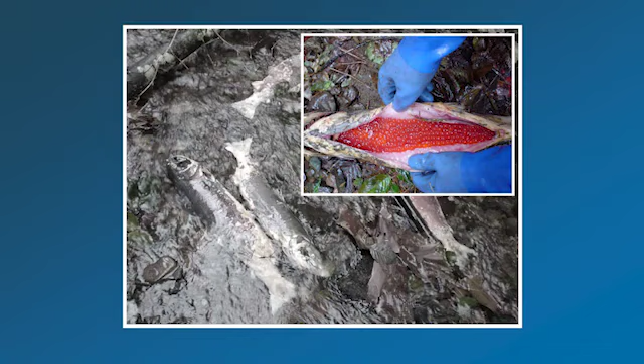And then in kind of the 80s, 90s, we started adding stormwater code to add treatment and storage so we don't affect our neighbors. That was great. My career began when everybody was realizing we're still really affecting the hydrology of our systems. We need to do low impact development, treat water at the source, do things that mimic natural hydrology. And that's evolved over the last 20 or so years to increase more and more nature-based systems.

And now I believe we're in this new paradigm that I call green infrastructure plus. Our local agencies are trying to use green infrastructure and stormwater management, and see the opportunity to not just manage stormwater, but to improve communities, to improve equity and resilience, to address disadvantaged communities that are most impacted by water and drainage issues, because that's historically where people have done that.

And that's really, I think, where stormwater parks come in. We have the ability to do more with stormwater management when we work with partners and create these spaces that manage stormwater, but also improve our communities.

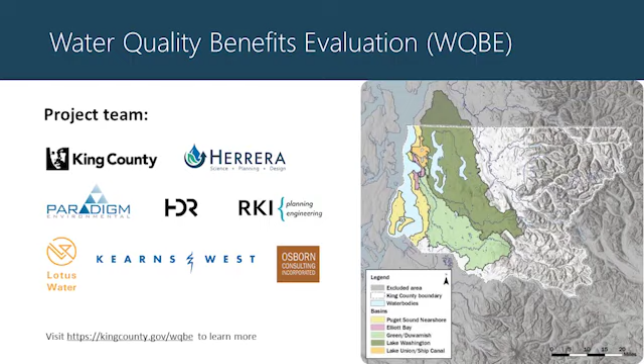So maybe we can have some discussion around this. One of the things as we were planning for this was, what is the definition of a stormwater park? And there's a couple that are out there, right? Erica Harris is here. She'll be presenting a little bit later on, but Puget Sound Regional Council has this definition in their literature. But really the key here is managing stormwater, benefiting communities, and creating recreational spaces. FEMA also uses the term stormwater parks, but they actually up the scale a little bit.

They talk about communities in this definition, and they talk about water quality, but also they talk about extreme events, because that is really where green infrastructure has come up short in historical ways. It's meant to manage the smaller storms and the hydrology. And it's a very key part of our toolbox.

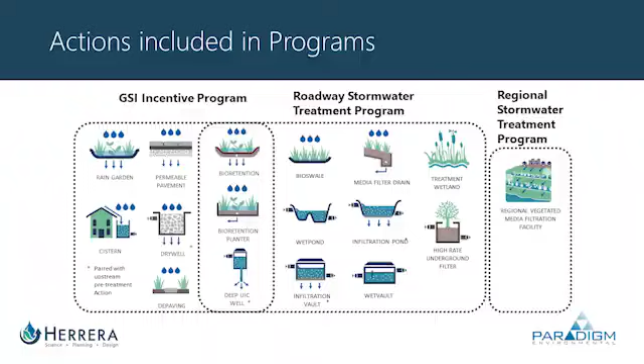But at times, we need extra storage. We need extra space to provide that water quality as well as having space. But we don't need that all of the time, right? So can we design stormwater facilities and parks that share the space, maybe temporarily or even physically? And I'm going to go into a couple of different examples as we go through there.

But if you have the need for storage during extreme events, those are often times when people aren't gathering in those spaces. So can you design it so that you're making it accessible and beneficial for all of those dry periods where it's not full of water?

So we went through an effort. We were also in King County and Seattle Public Utilities Green Infrastructure Program. And in, I forget what year it was, the mayor's office set a goal to manage 700 million gallons by the year 2025. So that's a core aspect of this program, meeting and achieving that goal.

SPU asked the question, well, how are our ponds doing? Can we count our ponds as green infrastructure? And so we went back over the definition of green infrastructure and said, well, what does that mean? And so the first thing we said was, well, the original definition that's currently in their plan was distributed stormwater management practices that mimic natural systems and provide multiple benefits.

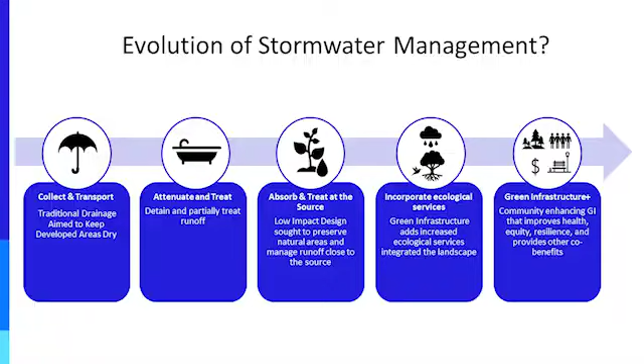We found that all we needed to do to be able to take credit for stormwater ponds is remove that word distributed. Because when we're talking about stormwater ponds, or stormwater parks, we're talking about more regional solutions. They're sometimes more concentrated, but that's not necessarily the only way to address the issues. And then what we found was really at the core of this definition is a two-part test.

Is there some function that we're providing for stormwater that's mimicking natural hydrology? And that could be through water quality, flow control, infiltration, reuse, or even mimicking floodplains. So we looked at all the ponds and said, okay, are they doing some function that's doing more than just a typical storage pond, but doing more of a mimicking of natural functions?

And the second part, which I think is really important, is it providing community benefit? And that benefit can range from public access for recreation, whether it's active or passive, to just being a visual amenity, or an amenity that the ecosystem can enjoy, and we're, again, supporting urban ecosystems through this.

And so we went through all of Seattle's ponds and basically categorized them and said some of these are actually green infrastructure because they are providing these additional benefits. And I think that kind of ties into these definitions of stormwater parks.

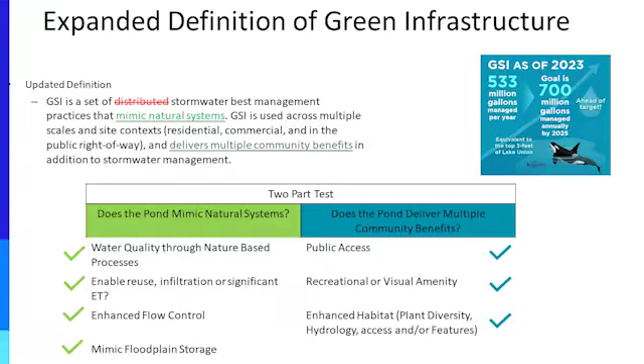I think another thing I want to get across is a big trend now for blue-green infrastructure. Who has heard of blue infrastructure? Yeah, it's about half of us or so, but I think that's also where stormwater parks fit in. It's a very specific type of green-blue infrastructure. Green infrastructure being that traditional definition of those small storm, distributed vegetative systems that mimic natural hydrology.

Blue infrastructure being those larger facilities that can handle larger or more extreme flood events and provide that active storage when it's needed. So blue-green infrastructure combines the best of both worlds. So green infrastructure practices like bioretention, permeable pavements, vegetated roofs, with more blue infrastructure that is larger ponds and surface areas where we can store water temporarily for extreme events.

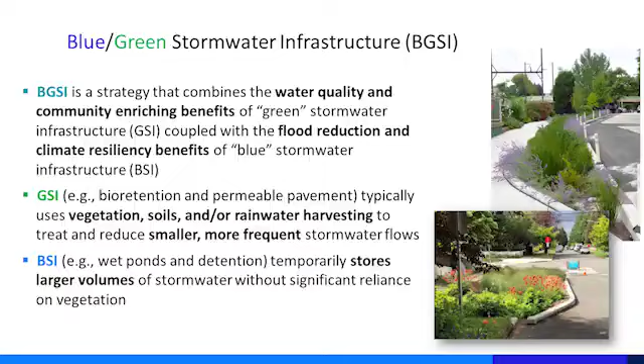And when we combine them together, we can get everything we want from stormwater to some extent, right? We can get water quality treatment, we can get resiliency, we can build systems that are adaptive, and we can enhance the community. And a term that's been used, where we're doing some work in New Orleans, is living with water. It's changing our paradigm from that drainage one that I talked about, where we're just moving the water away from us, to learning how water is a resource and it's something we live with, and extreme events do happen.

But we can build our infrastructure so we're sharing that space. When I started my career, we were building ponds that had fences around them, like stormwater prisons. I didn't want to build more stormwater prisons that keep people out. We want to invite people in a safe manner.

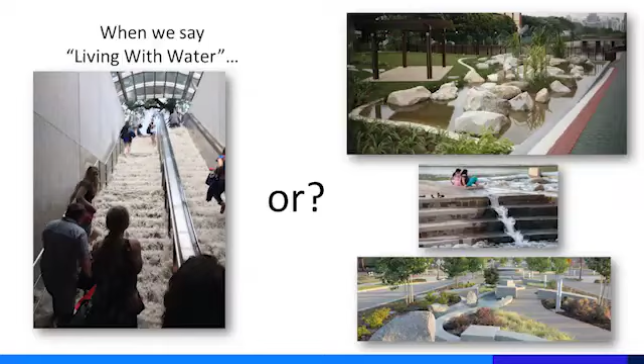So if we go for infiltration or reuse, we need a little more space. When we go for trying to address localized flooding, a little bit more space. When trying to address regional flooding, oftentimes that takes a lot of volume of water, so we need more space. But the community needs can be very variable. The community might be really in need of active space that they can use, and it's a little bit harder to share that area with stormwater. Or it could be more passive uses, more of a natural system where people just need access to green space.

So a really core aspect of that is exploring what are your true stormwater management objectives and what are your community objectives? And how can you find ways to overlap those either physically or in time, right? So it's whether you can use them as recreational space during dry periods and flooding during wet periods, or do you layer them? And that gets to this next point.

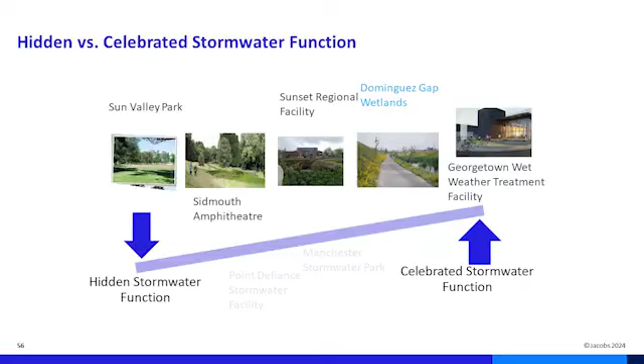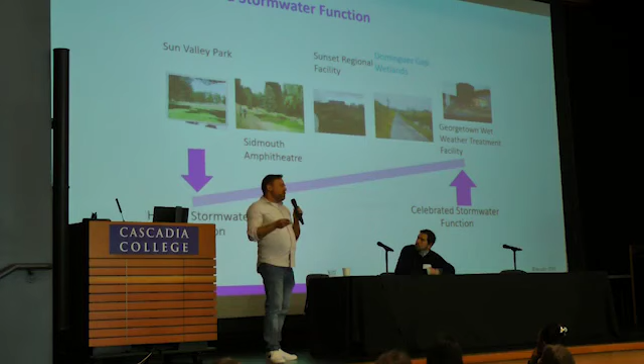Another way that I've looked at some of these stormwater parks is what are we doing with the stormwater? Are we hiding it in some way so that you can use more of that space for community uses? Are you celebrating the stormwater function? And I would argue that in the stormwater park, you could do either. It's really a matter of how it's sharing the space with the community needs. There's another scale that I haven't figured out how to put into this, maybe disguised stormwater function. When you initially look at it, it's just part of that community park space, but it's actually serving a stormwater function. And I'll show a couple of examples of how that's done.

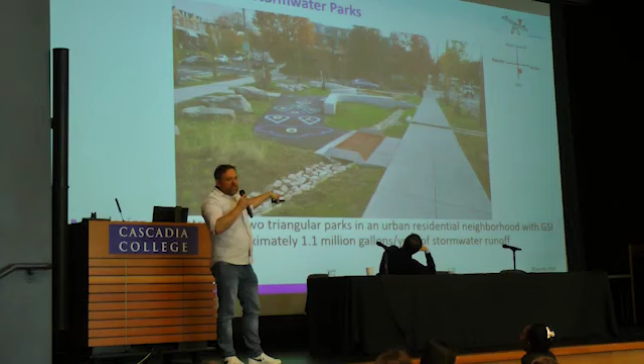It's another case where the stormwater is actually celebrated and we're inviting the community in, with play spaces to really playfully celebrate that function. You can see here we got a raindrops hopscotch little pathway there, and we've got benches around the water features so people can experience that space.

This is Rodney Cook Park. It's near the Mercedes-Benz, the new stadium there, but it's also a historically underserved community. In this area were residences that had been there for many, many years that frequently flooded because, lo and behold, this is where there used to be a creek.

And they piped it years ago to enable that development, and it floods. And this is unfortunately where more of the poorer communities would invest. And so they were very deliberate in Atlanta in engaging the community: what do we want to do here? You know, these are areas that are chronically flooding, and they ended up buying the property and building a park for the community and integrating stormwater into

that. So this is the footprint of it. As you can see, it's several blocks large. They worked with landscape architects in the community to kind of honor historic ideas for what this park could look like. And they basically built, in the center there, this permanent pool that is there as a community amenity for the park and providing water quality. But they intentionally designed this area to flood.

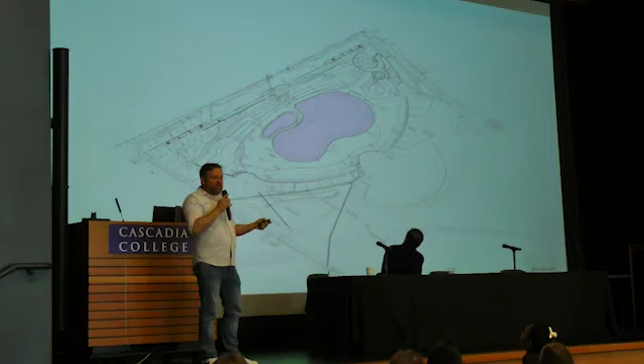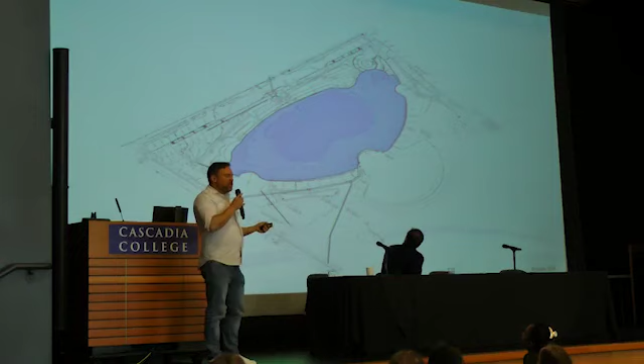So during normal periods, during the summer and all that time, it's this wet pool that's got pathways around it and some amphitheaters. But through the modeling, you can see during a 2-year storm, not much impact on park use. It's just filling up a little more of that surge area, filling the fringes. During a 25-year, it starts to flood a few of the pathways interior to the park, but still much of the park is accessible for the public to use. And then during the 100-year event, it's allowed to flood even further.

And this area that's an extra lobe there, as seen in plan view, is actually like a grass amphitheater, which, during a 25-year storm, people aren't using that space. But the rest of the time, it could be a really great community space. So this is, again, back in plan view. You can see that there's the permanent pool, but the dashed red line there is how much is flooded during a 100-year event. So again, an example of sharing that space temporarily so that you can create a community amenity while also managing stormwater.

And this is the built facility from perspective. There are really cool, thoughtful things they did in this project. They've got walkways and boardwalks that go out over the wetland area so people can really interact with it, look down upon it and see the wildlife that's thriving there now. Also for safety, but also as an amenity, that fringe area is a denser wetland to discourage people and children from going into the water, but you don't need to do that with a chain link fence. There are really cool features in your landscape architecture design to make sure that you're discouraging that space and educating people that this is a stormwater facility.

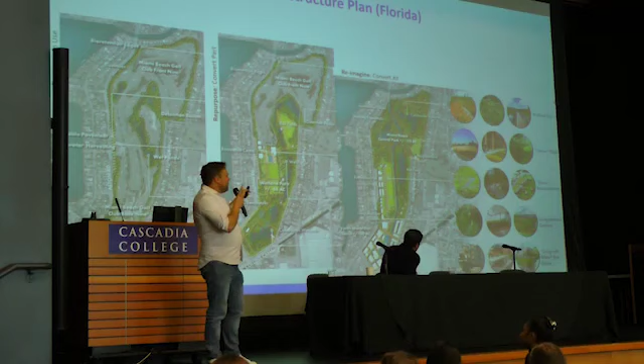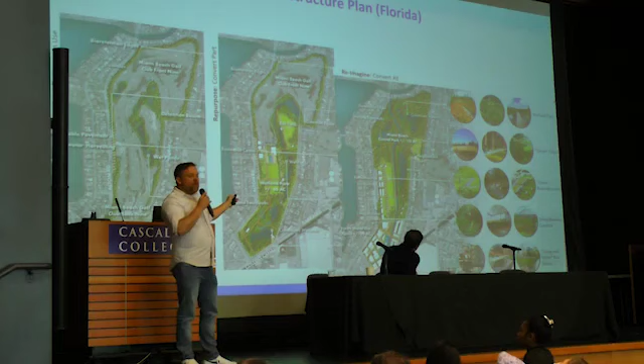One of my last national examples, this is a plan we did for Miami Beach, the blue-green infrastructure plan. Throughout that entire plan, we looked at the entire city and said, what are areas we can do blue-green infrastructure? And one of the ideas I want to highlight here is they have an old public golf course in the middle of the city that is no longer as economically viable as it used to be. People are going to other golf courses in Southern Florida. The idea here is we looked at different scales of stormwater interventions. The first one, the lowest level, is just keep the golf course there, but take all those water features and make them manage stormwater. So allow them to fill up more, allow them to have better function for stormwater quality.

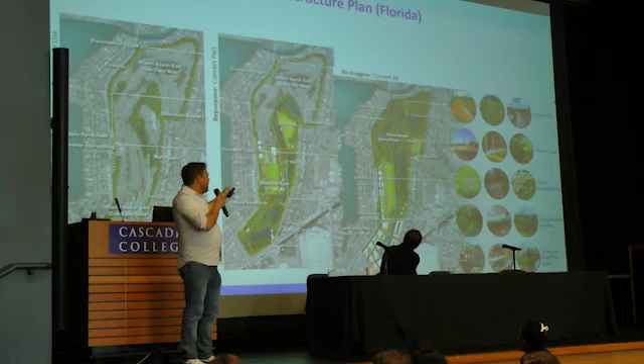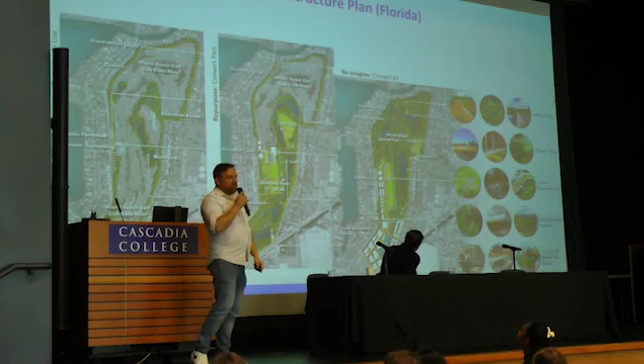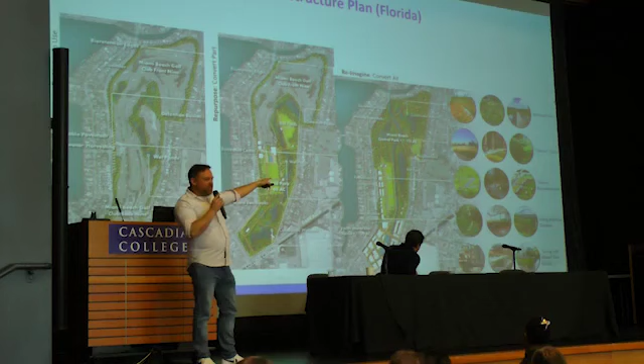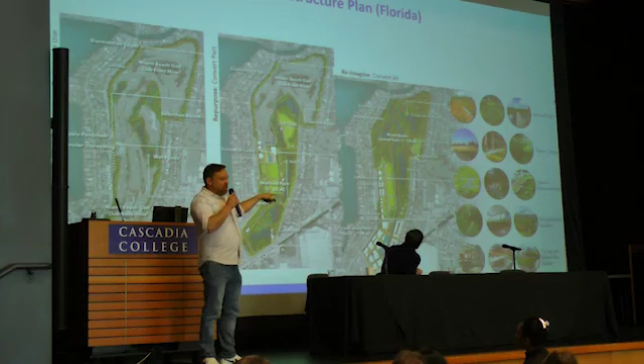The middle idea is let's keep a 9-hole golf course, but integrate the other half as natural systems, more passive recreation for the community, maybe put a few ball fields, but it allows us to do more stormwater management to address the large coastal storms that happen there. And the last idea is to really re-envision the space and think about the land use. So on the right-hand side, you probably can't see it because it's a big room, but there's a whole lot of green infrastructure and blue infrastructure practices we can integrate throughout this park space to meet the stormwater function and enhance the community.

So moving into some international examples, because we have some really great ones. Obviously, this is not a Jacobs project, but a lot of us get our inspiration from Copenhagen and the Netherlands and areas like that that have been managing and living with water for many years. This one's an interesting one. This is Benthem Square in Rotterdam.

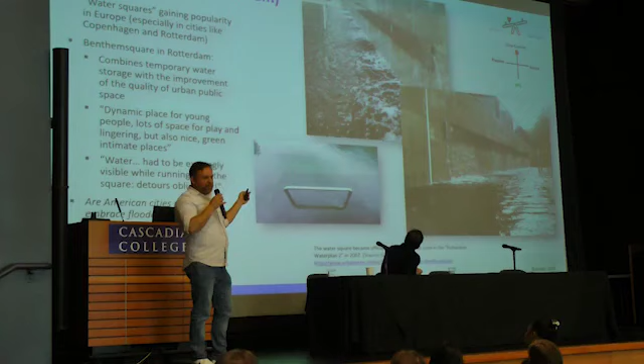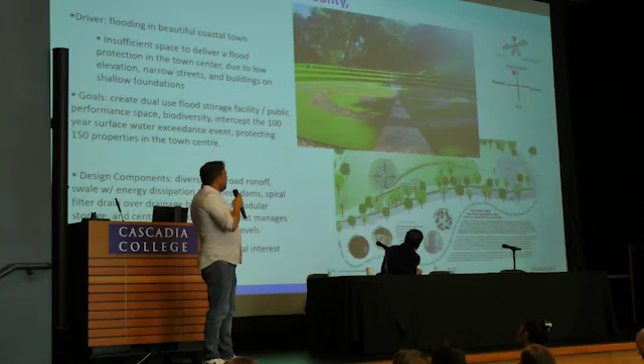What I think is interesting and worth highlighting here is this is like a public plaza. It's an area where we're having people gather and it's a hardscape surface, but they allow it to flood. In some of those areas, they even have stairs leading into the flooded areas. Now, from a legal perspective, in the States, we might have to think about that, right? Because oftentimes we're trying to put fences around those areas or saying we have a liability issue. But there are ways to do this thoughtfully.

Another cool example, this was from the UK, United Kingdom. This is in Devon County, which I believe is the southwest coast of England. There's a really cool community called Sidmouth that had about 150 residences and businesses that would chronically flood. And in looking for solutions, there's just no space in that urban space right next to the flooded zones to be able to manage stormwater. But upstream, we found that we could divert flow into this natural area.

One thing we found when talking with the community, they had a large history of community theater. I think they had some ties to Shakespeare, things like that. So they'd have an annual Shakespeare festival and things like that. So the vision for this one was, let's create an amphitheater for these folks. Let's do an amphitheater, which is essentially a bowl, but that's going to function as a stormwater pond during large events. But other times it's a community space.

So there's flow paths that lead people into it, tell people the story of how it's managing stormwater and managing the flooding impacts to the community. But again, during dry periods, you just have this really cool central amphitheater for people to be able to experience. Just a few more pictures of that, an aerial showing it and the community it's protecting. This is immediately after construction and during construction. And again, we have bioretention soils in there. We have a very special feature that's going to get flooded.

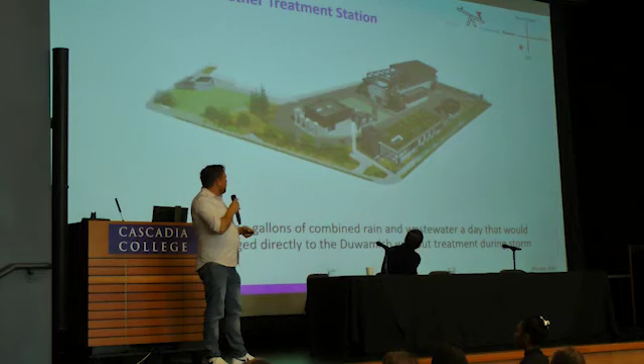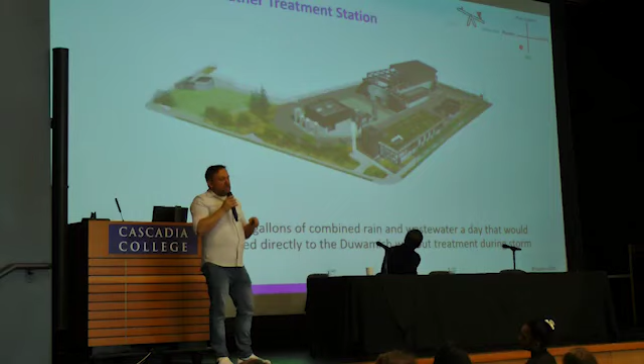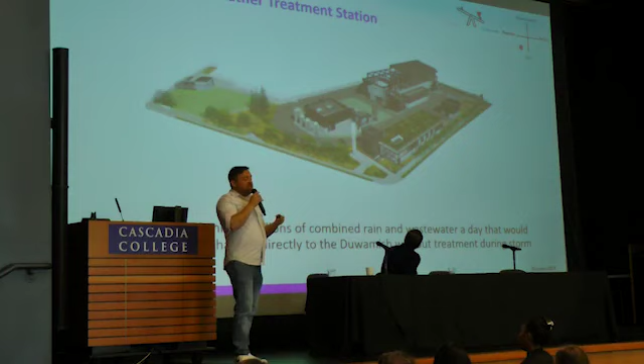Another one at another scale is King County's Georgetown Wet Weather Treatment Station. This is a stormwater facility, right? It is a machine to treat stormwater, but that does not mean that it can't be an asset to the community. In this case, there's a lot of green infrastructure integrated throughout that site, rain gardens, vegetated roofs and cisterns. And there's a lot of community education spaces that King County provided so they have a place to gather and learn.

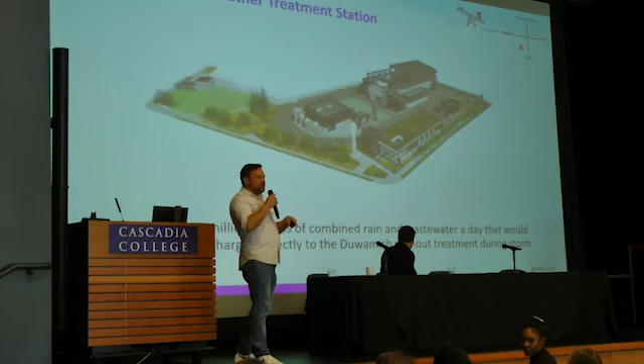Because the community actually said, okay, you're doing this. We want to see it in action. We want to know what function this facility is doing. Don't hide it. Show us what it's doing.

This might be my last one. So this is in City of Renton. This is the Sunset Terrace Regional Neighborhood Park. This is part of an overall planning effort for the Sunset area to revitalize it. Lots of community engagement to develop the community vision for this area. And what they said is they need a park.

They need some assets to be able to connect a lot of these community assets, because there's a senior center, there's a couple of elementary schools and the middle school, there's some other parks in that area, but they're all disconnected. And there's also a regional housing authority there. So the city developed a partnership with the King County Library System, Renton Housing Authority, and a private developer to re-envision this area and do some land swapping to create this neighborhood park.

And as a catalyst for that, the first thing that was built there was a regional stormwater facility, leveraging Department of Ecology grant funding to build a portion of that park first. And then that enabled City of Renton's parks to apply for funding to build the rest of the park around that. And this is an example where you're blending the design. We're kind of applying both techniques.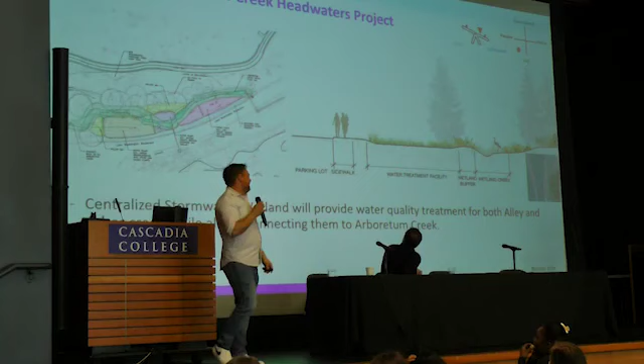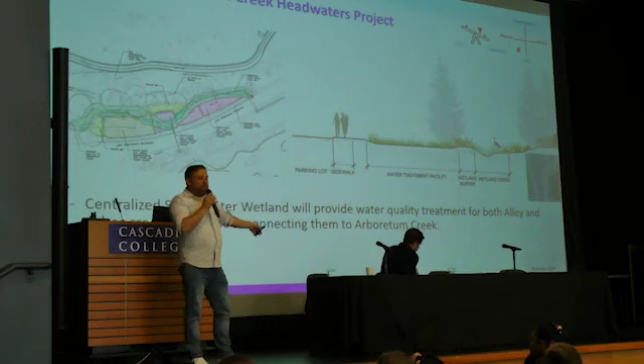Oh, I do have one more. So this is one that's in development. It's 60% design right now, working with a small group called the Friends of Arboretum Creek. They're neighborhood residents in the area of the Seattle Arboretum. And there's historical streams that were plumbed into the King County combined sewer system, which is actually starving Arboretum Creek, a creek that runs through the Arboretum. Their goal has been, let's restore that creek.

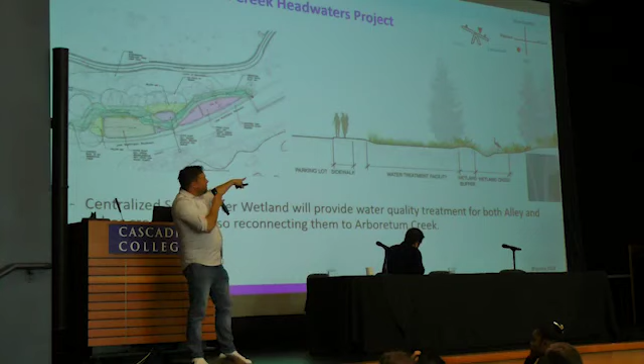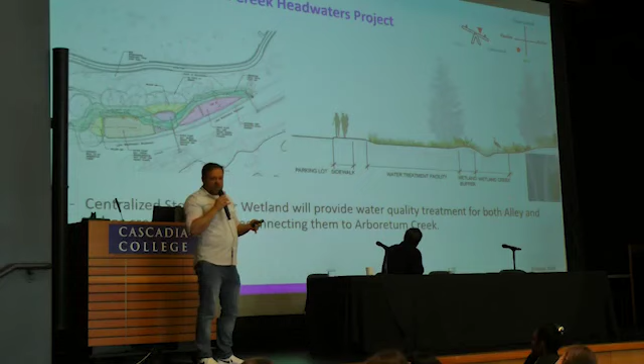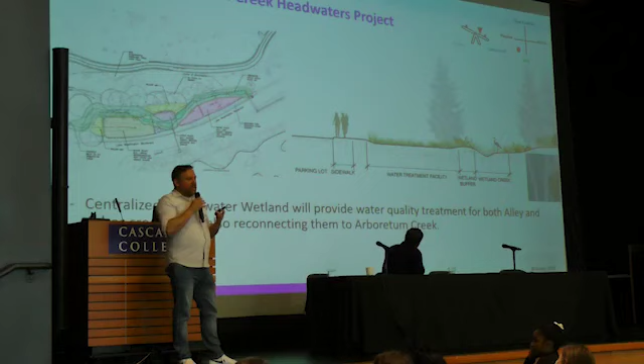So what we're doing is building a conveyance system to collect the spring flow and the neighborhood runoff and treat it through a subsurface wetland before it discharges as recharge to Arboretum Creek. So that's in the process of design. We're looking for funding. If anybody's got construction funding, we'll talk. But it's really cool because it's a community-driven project. And we're integrating stormwater within it and trying to be very context sensitive to the uses and the history of the Arboretum.